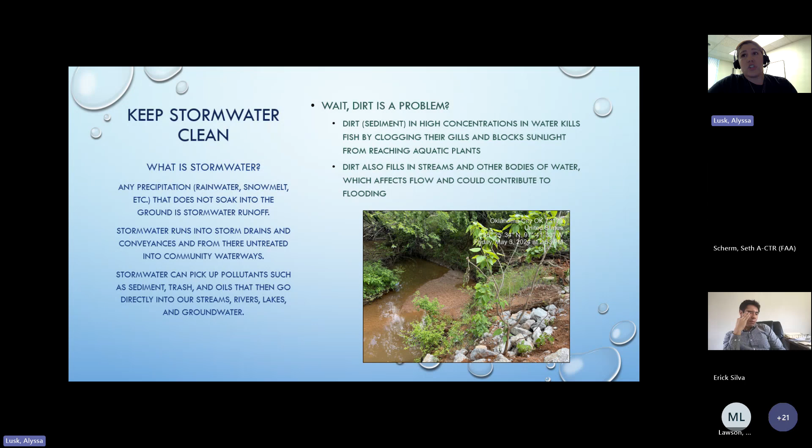And here in this picture, whoops, I don't know why I keep switching. Here in this picture, you can see an example of sediment runoff from a site that has impacted a stream. It's created its own little sandbank there, and that's going to change both the properties of the flow of the stream, the habitat, and also, if it keeps going, it will fill that stream in completely.

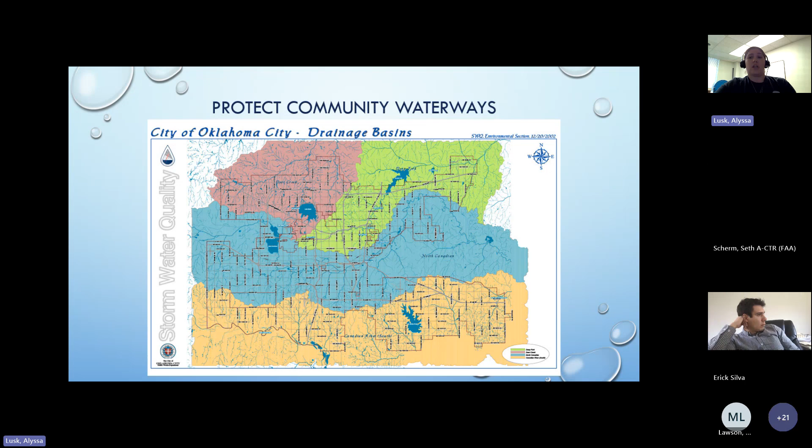So protect community waterways. The city of Oklahoma City is big. Our community contains 4 watersheds. That's Deer Creek, Deep Fork, the North Canadian, and Canadian River or South. Many major streams and tributaries, ponds, lakes, and the Canadian River. These waters belong to all of us, and one of the major goals of stormwater construction regulation and compliance is to protect these community resources from impacts related to construction, such as sediment runoff or chemical pollution.

4823G states that neighboring persons and property shall be protected from damage or loss resulting from excessive stormwater runoff, soil erosion, or deposition upon private or public property or public streets of water-transported silt and debris. Adjacent property owners shall be protected from land devaluation due to exposed bare banks.

So the 3 major impacts we see from construction on neighboring properties and neighboring houses are dust, runoff and flooding, and sediment. For dust, it's not uncommon during large-scale construction projects such as subdivisions to have time between major construction activities where the site is idle. Often sites are grubbed and graded, which disturbs the topsoil and leaves it friable and subject to blowing, and then left for some time waiting on availability from utility installation contractors. This is a major source of dust.

Sites are required to initiate stabilization on areas where construction has ceased for 14 days or more. Sites should also implement a regular watering schedule during normal activities as a minimum dust control.

The way erosion and sediment controls are implemented is also important to runoff and flooding. These controls must not direct runoff in such a way that it floods neighboring properties or causes excessive runoff to leave the property, which includes not blocking storm drains.

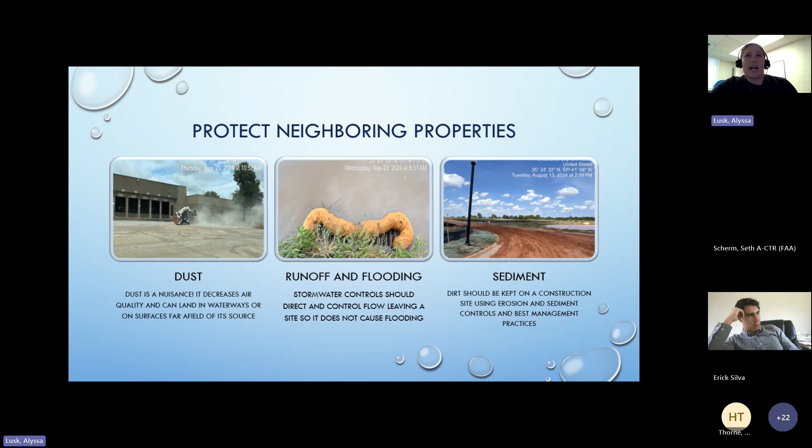Sediment is perhaps the most obvious impact on neighboring properties. No one wants dirt flowing into their yard or tracked into the street. Many construction BMPs are specifically aimed at preventing sediment from leaving a site. So what do we look for?

To help accomplish the goal, keep stormwater clean, stormwater quality regularly inspects construction sites to identify problems, often before they become pollution. Sites are divided by the size and nature of the project into Priority 1, Priority 2, and Priority 3. Priority 1 sites disturb 1 acre or more and are inspected every 30 days. Priority 2 sites disturb less than 1 acre and are also inspected every 30 days.

Priority 3 sites are demolition projects and are inspected once per quarter or every 90 days. When necessary corrections are listed on an inspection, permittees have until the next inspection to correct the deficiency, unless enforcement action is issued. If a site is issued enforcement action, a time frame of 7 to 14 days to complete the correction will be specified.

Stormwater quality also responds to concerns raised by residents when they are impacted by construction sites. Operators and permittees are responsible for minimizing impacts to neighboring communities and waters. We also provide guidance and answer questions regarding regulations and regulatory compliance.

Remember the diversity of projects in the Southwest sector? Smaller construction projects may involve contractors who have never encountered stormwater regulations before. It's our job to know the law, explain it when necessary, and make sure it's followed.

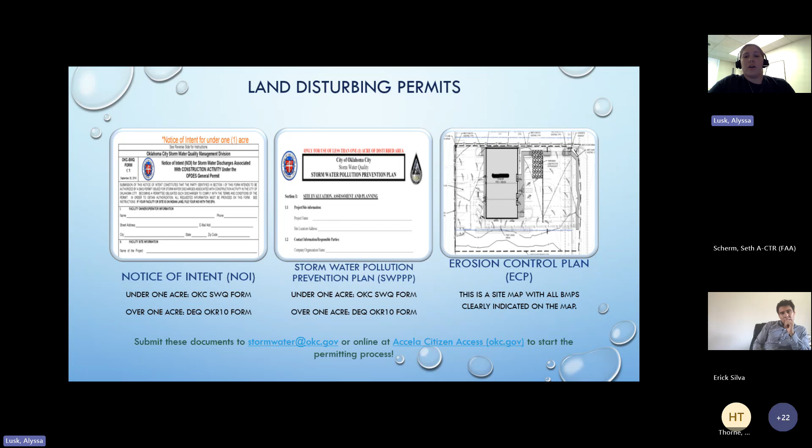So per Municipal Code 4816G2, upon completion of construction activities, permittee must stabilize the entire site by planting, growing, and establishing a uniform perennial vegetative cover until a density of at least 70% of the native background cover has been established for all unpaved areas. When the site has been fully stabilized, permittee must submit a signed notice of termination to the director or designee for review. The BMP manual clarifies 70% to mean 70% per square foot.

To transfer a permit, a notice of termination for transfer must be submitted, and the new operator must obtain permit coverage by submitting a notice of intent, stormwater pollution prevention plan, and erosion control plan, just like getting a new permit. It's the same document, but Section 4, new operator information, will be filled in for a transfer and not filled in to close a permit. This is a really common issue we see on construction projects where projects are done, but they haven't been closed. And to close a permit is very much required by municipal code.

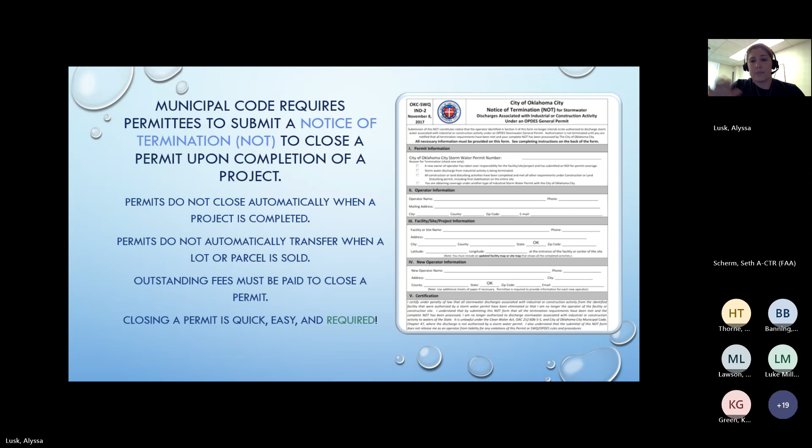So who needs a permit? 4815 defines land disturbing activities as any land change which may result in soil erosion from water and wind and the movement of sediments into community waters or onto lands and roadways within the community, including, but not limited to, clearing, dredging, grading, excavating, transporting, storing, stockpiling, mining, disposing, and filling of soil, earth and materials, or land.

Further, 4816B lists all land disturbing activities not requiring a permit. And those are such minor land disturbing activities as home gardens and individual home landscaping, home repairs, home maintenance work, and other related activities which result in minor soil erosion. The construction of single-family residences when built separately on lots less than 1 acre, not within a subdivision, and they have been issued building permits, provided that excavation is limited to trenches for the foundation, basements, service and sewer connections, and minor grading for driveways, yard areas, and sidewalks, with no offsite discharge of pollutants.

Individual service and sewer connections for single or two-family residences, agricultural practices involving the establishment, cultivation, or harvesting of products of the field or orchard, preparing and planting of pasture land, forestry land, management practices, including harvesting, farm ponds, dairy operations, and livestock and poultry management practices, and the construction of farm buildings.

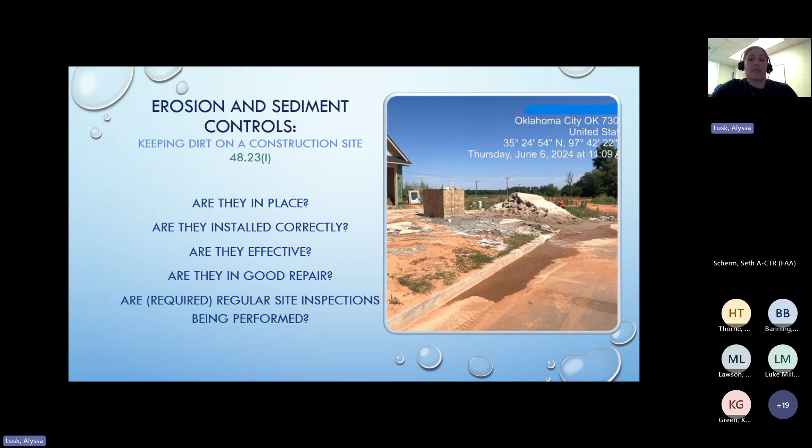Erosion controls and sediment controls are different things. So one of the most common problems we see here is no erosion control on sites. We see a lot of silt fence and not much else. Erosion controls help keep runoff and erosion from becoming a problem.

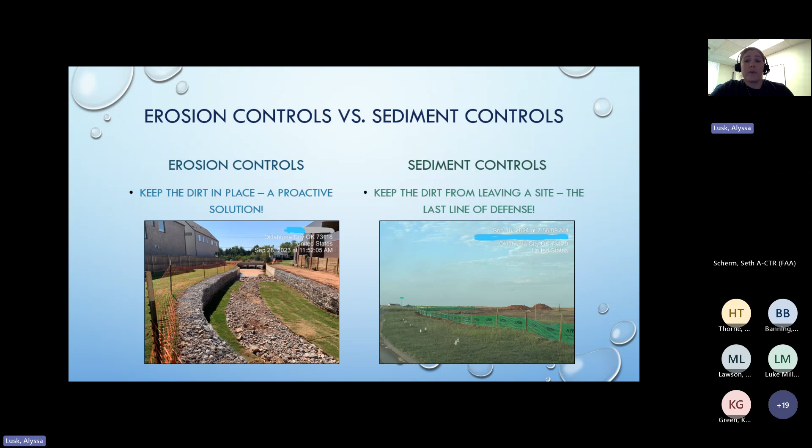If controls are installed, they may not be maintained. Regular maintenance is required, and maintenance issues should be identified during the requisite regular inspections conducted by site personnel.

A construction entrance or exit is anywhere vehicles are entering, exiting, or accessing a project area. A construction entrance can also refer to a constructed area consisting of filter fabric laid under surge, which is 2 to 3 inch coarse aggregate rock, a minimum of 20 feet wide and 50 feet long, per the BMP manual.

Entrances might be installed, but some contractors are using another location to enter and exit the property. Or sites are not sweeping daily. Every day there is work going on a project, they should be sweeping all of the hard surfaces around it to keep tracking to a minimum. We don't expect sites to be magic and not track dirt off. We do expect them to clean it up and minimize it.

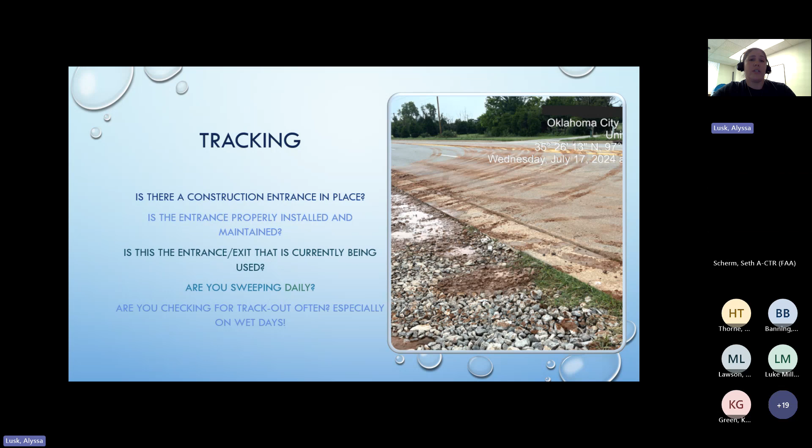There we go. Any area disturbed during a project, whether it's within the permitted boundaries of the project or even the property lines, must be stabilized as part of that project. Permanent stabilization is 100% coverage by something other than vegetation, gravel, concrete, asphalt, etc., or at least 70% uniform coverage per square foot in perennial vegetation.

Vegetative coverage is what causes the most hangups for construction sites. If the site was seeded or hydroseeded, the seed must germinate and provide 70% uniform coverage, that's 70% per square foot, before it will pass final inspection. If the site is strip sodded or covered 70%, leaving 30% bare, that is 70% coverage, but the coverage isn't uniform and that will not pass a final inspection.

Occasionally, contractors disturb an area outside the site's permitted boundaries or even outside the legal property line. Any area disturbed during a project as part of or related to that project, such as driving through an area or connecting to utilities across the street, must be stabilized as part of that project.

Construction is sometimes not phased correctly, with huge areas grubbed and graded and no work scheduled for months to years out. Sites must stabilize as soon as an area is idle for 14 days or more, or within 7 days if the site is designated as DEQ high priority or with an area of an aquatic resource of concern, such as the Lake Thunderbird watershed.

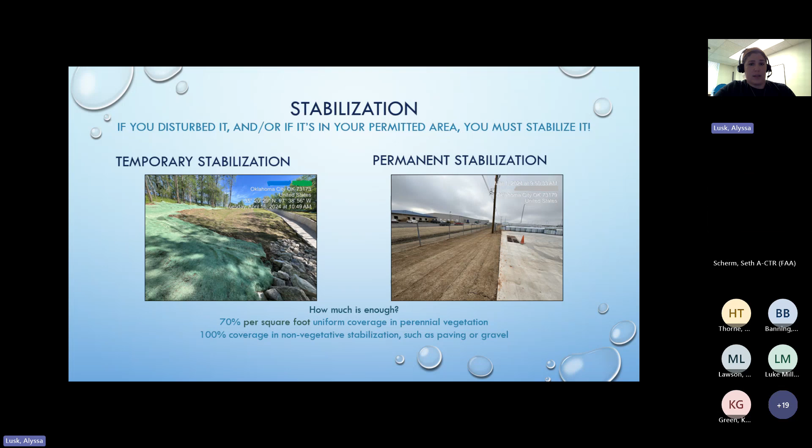Sediment is big, but it isn't the only regulated discharge. Many other construction activities, necessities, and byproducts are all potential sources of pollution. Dust concerns are some of the most numerous action center concerns we handle in stormwater quality construction. Some common objections to dust control are, if sites spray water for dust control, it increases tracking. That's true, and sometimes there's no help for that. But tracking is the lesser evil as it's easier to clean up and does not spread the way dust does.

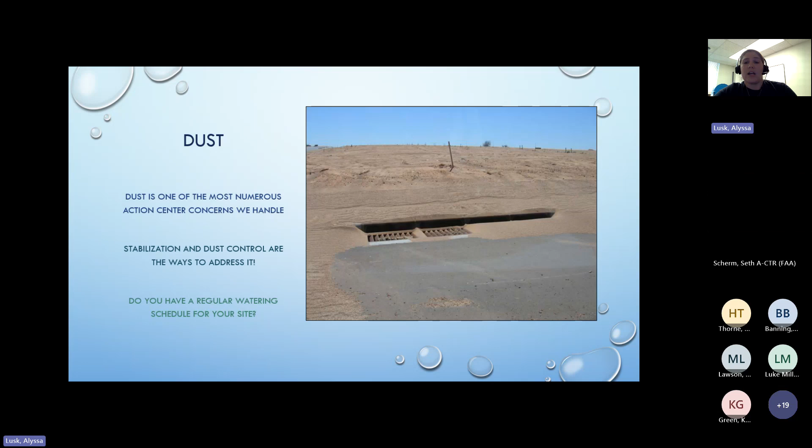As an alternative to a more frequent regular spraying schedule, sites can consider polymerization, which will interact with dust particles at a molecular level and help them stick together, which weighs down that top layer of soil and reduces the frequency of spraying required. Sometimes the section of a project that is producing the most dust is not the section that is actively being worked on. But you might recall, sites must initiate stabilization as soon as an area is idle for 14 days or more, or within 7 days if the site is designated as DEQ high priority, or within an area of an aquatic resource of concern, such as Lake Thunderbird.

So, portable toilets. We see a lot of portable toilets on their side. Sometimes we get told there are no holes in the feet or I can't stake it where it is. You can try sandbags on opposite corners or move it to block it and brace it with something else. But we don't want the toilets to fall over any more than construction sites do.

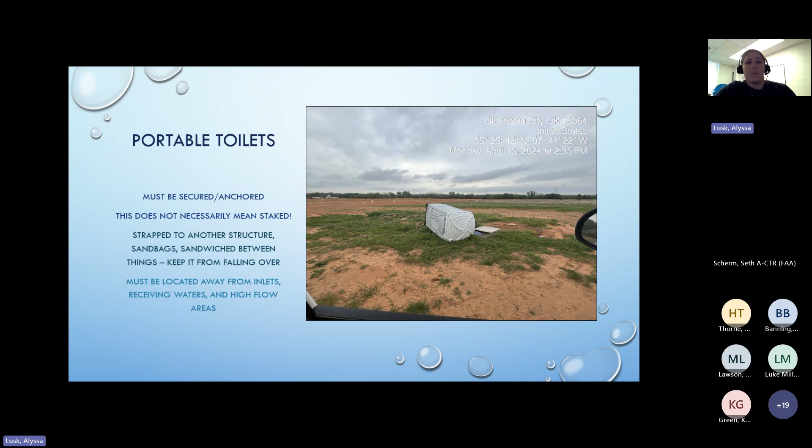So for fuel and other chemicals, they have to be isolated from stormwater contact. That means covered and/or in secondary containment. The container should also be labeled accurately. Common problems we see is it's on a pallet, but it's not a spill containment pallet. It's just a regular pallet, and that's not secondary containment.

Sometimes sites will reuse containers, and you'll hear, well, that's just water in there. If it has a diamond label on the side that says Class 8 corrosive, it's corrosive, and I'm going to assume it's corrosive. Containers that are reused should be labeled very clearly as just water. I've also heard we can't move them or those belong to subcontractors. Under cover can also mean tarped if you can't move something, which is acceptable for temporary storage.

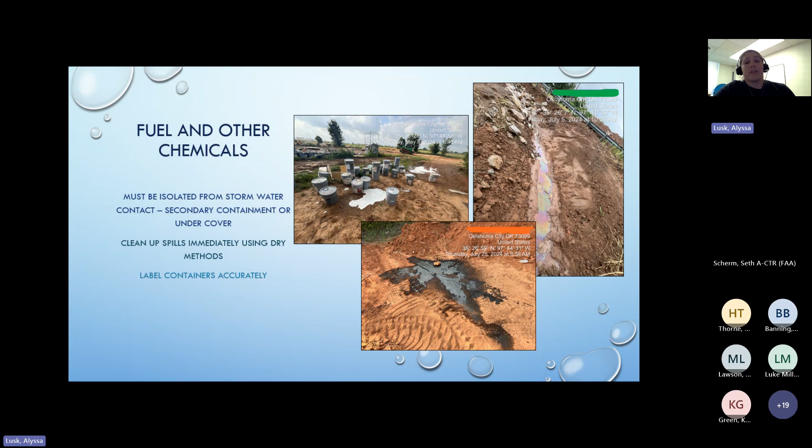Blowable, floatable trash is a big problem because this is Oklahoma and it is always windy. So we expect sites to use the dumpster and to cover dumpsters when not in use. Some things I have heard on sites a lot are we did use the dumpster, but the trash blew out. Again, cover the dumpsters when not in use and empty containers regularly so that they don't get overfilled. I've also heard that the contractor says picking up trash is not in their contract. It's a site responsibility. So anyone associated with that site, the permittee is responsible for picking up that trash or making sure it's picked up.

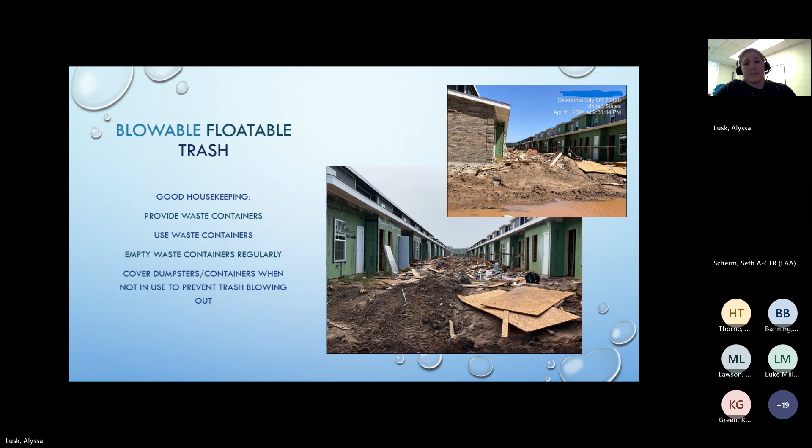So washout is another big one. Some common issues we hear are, but it's water-based paint. It doesn't matter. Only pure clean water can go on the ground. Any kind of washout, concrete, paint, masonry, stucco, has to be directed to a leak-proof container or pit. There are engineering drawings for these in the BMP manual if someone's confused about how to set them up, but it literally just has to be a leak-proof container or pit. I have seen people use kiddie pools and that's compliant. Often I see masonry stations set up on the ground. They should be set on plastic or in some other kind of containment to keep their mess off the ground.

I've also been asked, why does concrete washout matter if we're going to pour concrete there? So the extra water involved in washout picks up the high pH of the lime and concrete and more readily transfers that chemical contamination into stormwater and groundwater. So even if you're going to pour concrete there, it's a little bit different when you mix in the extra water by washing it out.

Also, sometimes I'll look at something and it's just a substance on the ground that is light in color. It's clearly construction related. It's clearly not stormwater, but I can't tell what it is. So I'll say something like, remove the masonry compound from the ground. And I'll get told, oh, well, that's stucco or that's drywall mud. It doesn't matter. Only pure, clean water can go on the ground. So a lot of the time, what I term things in inspection reports is non-stormwater discharge.

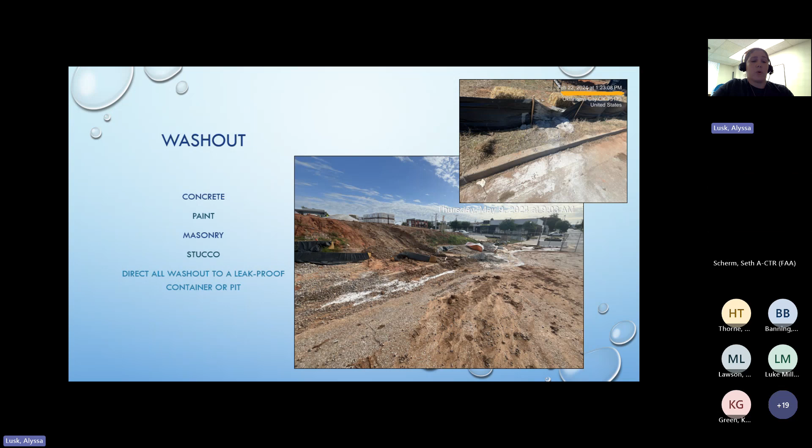Stormwater quality construction inspectors may be the first or only inspector a site sees depending on the size of the project, so we get a lot of questions about other required city inspections and permits. There is occasionally confusion between our permitting and the DEQ's. Sites disturbing 1 acre or more require both a permit with the City of Oklahoma City and the DEQ. Permitting with one doesn't mean you have a permit with the other.

Sites with an existing stormwater industrial permit that are also doing construction activity will need a land disturbing permit too. Your industrial permit won't cover it. Sometimes, if you've sent in an NOT, but we didn't get it, you may have sent it to the Department of Environmental Quality. We accept the same paperwork, but it has to be sent to the city as well. For any other problem you see, you can call the Action Center at 405-297-2535 and make anonymous complaints.

So, who do I contact? We are here to answer your stormwater questions. We divide the city into six sectors, so there's an inspector for each sector. Even if the inspector you've worked with before isn't in the sector you're working in now, you can call them and we'll get you the number for who to contact. You can also always contact the Stormwater Quality Main Office at 405-297-1774 or reach out to Melanie or Jimmy. But we're here to answer your questions and we're here to help. We want to get compliant together.